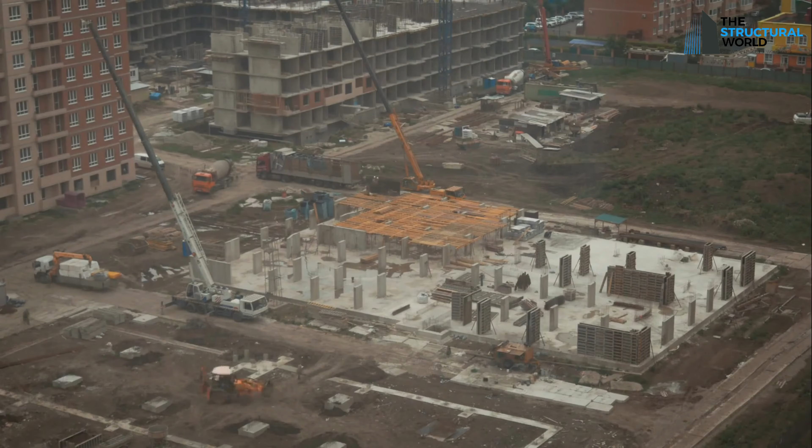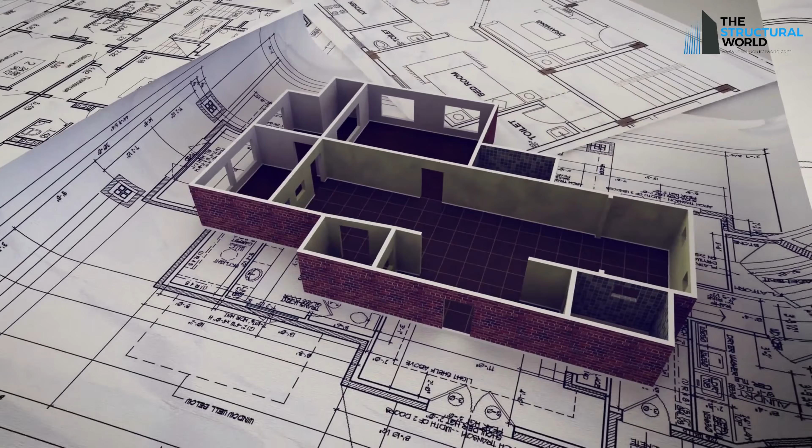1. Structural drawings contribute to project documentation. As soon as the construction gets started, structural drawings contribute to the project critically. They represent a plan in detail on how a proposed project will be executed. It contains construction standards, the strength of materials and specifications, structural schedule, member sizes, dimensions, and layout of the construction elements necessary to complete a structure. The completeness and clarity of the details shown in the drawing have a big impact on the contractor or builder's understanding of how to construct a certain project. These structural drawings, along with other disciplines, can be issued for tendering and eventually give an idea of the total cost of the project.

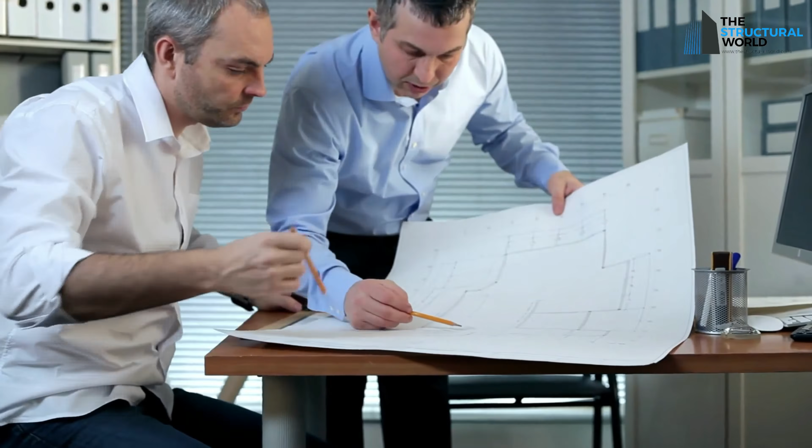2. Get a quicker building permit approval from the AHJ. A quality structural drawing allows you to get your building permit right on track with your schedule. Acquiring building permit approval from the authority having jurisdiction is no joke. This will go through a standard procedure of thorough review checks for compliance with local or international design code standards. Since it is a reflection of your structural design, the AHJ will go through your design calculations as well to see if the drawings match the structural design results.

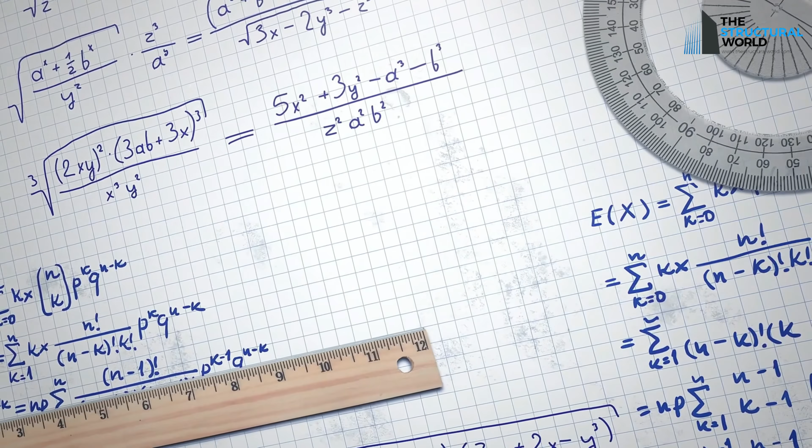Errors and mistakes in the calculations versus the drawings may result in possible rejection of the approval. This may cause a delay in the project, as you need to resubmit all over again for design modification and revisions. On the other hand, if you present a carefully created, accurate, and compliant drawing, you will likely get the building permit faster. It will reduce the number of revision cycles, allowing you to kickstart the project.

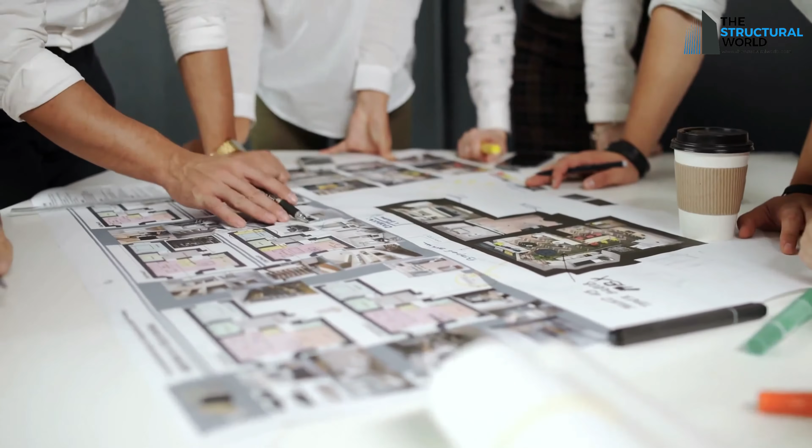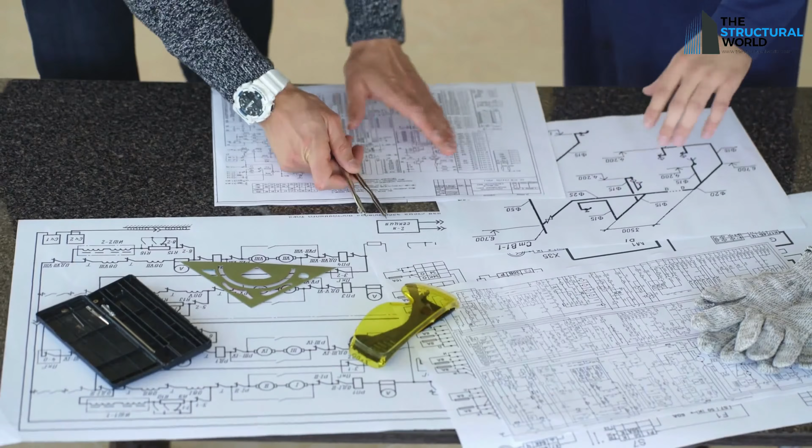3. Contractors can give precise and accurate estimates. When you discuss your construction project with prospective contractors, they will provide you with estimates for the work. Generally, they check drawings issued by the design team for building. In order to get the most accurate quotations or estimates, these drawings need to communicate all the key requirements of the project efficiently. If the drawings miss out on details or convey vague requirements, the contractor might also miss out on important scope areas. Such blunders or inaccuracies in the documentation cause the contractor to overprice the bid. As a result, the construction cost may not align with your budget.

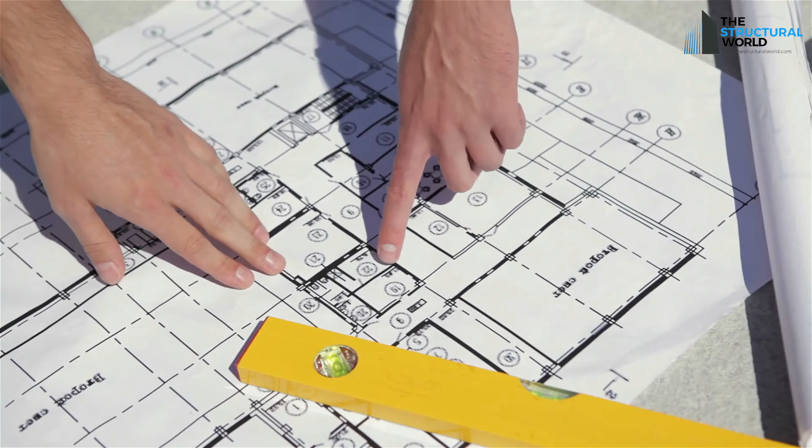This is where a quality structural drawing comes in. Good quality drawings comprise all the details and accurate requirements that allow potential contractors to give the most appropriate quote. This saves you from unnecessary headaches.

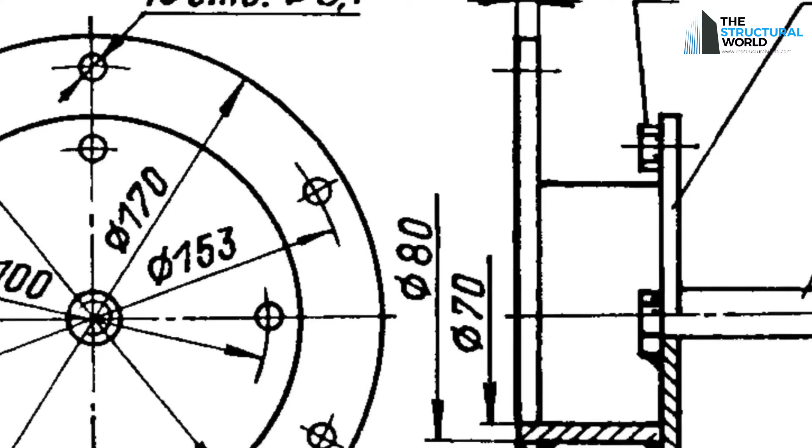4. Reduce extra construction costs. If the contractors are unclear about the project's requirements or misinterpret your structural drawing, they may seek clarification via RFIs, or requests for information. Raising an RFI is necessary, but it consumes a considerable amount of time and resources. To avoid such scenarios, a quality structural drawing is required. Inaccurate structural details also misguide the contractors amidst the construction process, resulting in additional cost changes or change orders. With a quality structural drawing, you can reduce such chances and reduce extra construction costs.

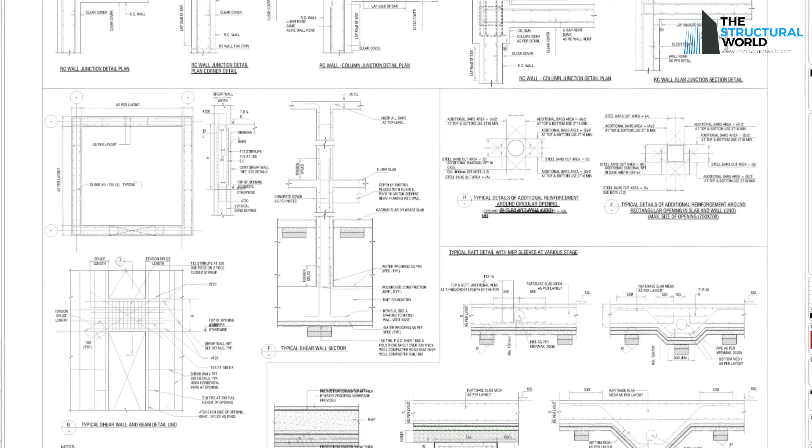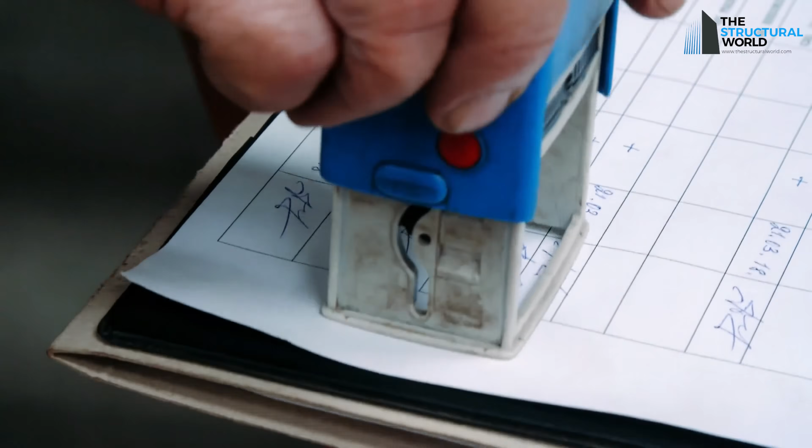Consult the professionals. To avoid the derailment of your construction projects, consult the professionals. Only a licensed professional engineer has the skills to narrate the structural details. Thus, local officials also require professional engineers to sign the drawings. Don't confuse a structural drawing with a conceptual sketch drawn by anyone who doesn't have any professional knowledge.

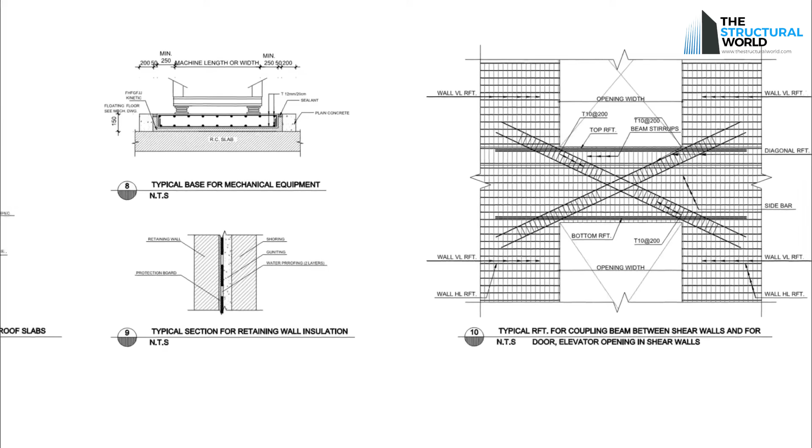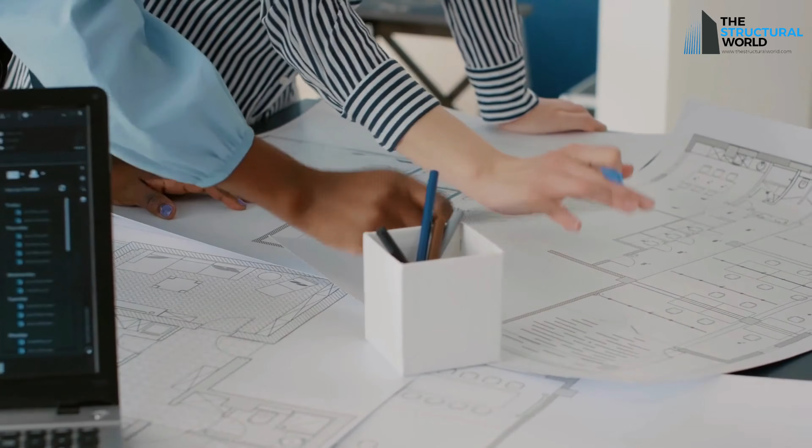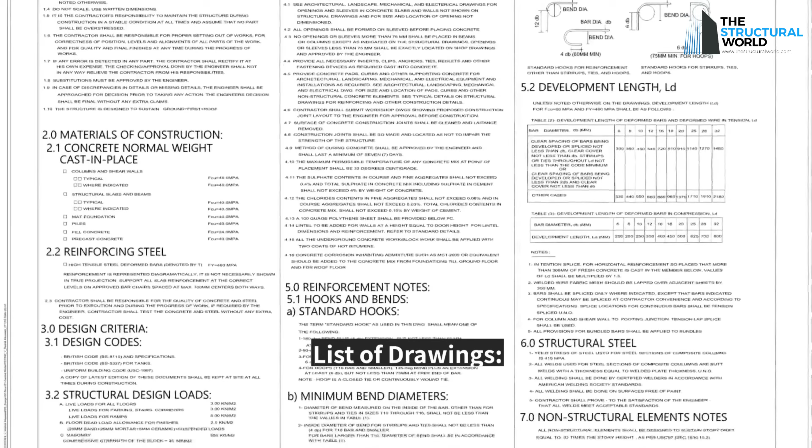A structural drawing is a plan or a set of plans describing how a building or structure will be built. It includes critical elements like column-to-beam junctions, lift or sump pit details, spandrel and corbel details, punching shear links, transfer beam details, construction joint details, and a lot more. A structural drawing should be well-drafted with precise details, ensuring that all the design requirements as per design standards are met. If there are any design issues in the drawing, they should be addressed and resolved before construction. The design team should not leave any space for guesswork or confusion, to enhance constructability, cost efficiency, and minimize design failure. Check out the following recommended list of structural drawing layouts and details that a quality structural drawing should contain.